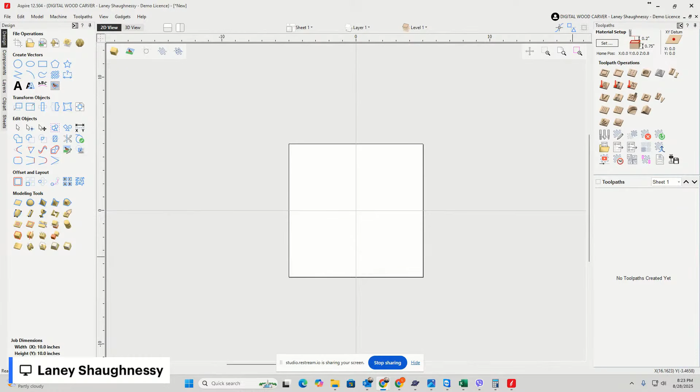But it's going to be a two-sided project. If I can figure it out, right now the bottom side is just going to be kind of smooth with a flat bottom. But if we play around a little bit, and if I can get that wavy, spider web look to the bottom, we'll do that. I honestly don't know, it's one of those things where you see something and go...

Shoot, how do you model that? I'm like, I know how to make a wavy flag, you know, the vectors and everything. That would probably be just a bunch of peaks, because it's going to be a 2-rail sweep, and then it's going to be draped over the bowl. So it'll be an add, you add one shape to another, that gives it that roundness and stuff. I know how to do it, but I don't know if it's going to get me that valley look and stuff. So we're going to play around with that.

But first, the spider web, the bowl, top of the bowl and everything, the main thing, it's going to be easy to do. I think it's going to be fairly easy to do. It's a few simple things, and we are going to see if we can go through it, see if we can get it done, and we're going to go from there.

Now, of course, this is an Aspire project because we are modeling. I'm literally going to draw the vectors, or create vectors in different ways, and create this from scratch. But if you don't have Vector VCarve Pro, don't worry.

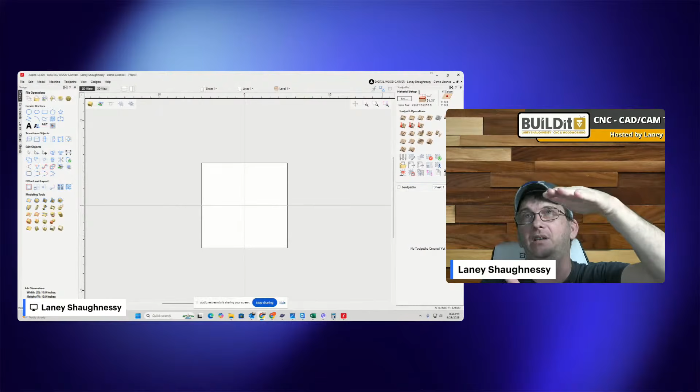The depth of the bowl is either going to be kind of a shallow dish type bowl, or it's going to be a deep bowl, depending on the capacity of your CNC machine - how much room you have to work with. Some machines have a Z-axis with some height, some have low heights, some have high heights.

The stock I'm going to be working off of is either going to be between 1.5 inches and 2 inches. I'm going to use a 2-inch block. But even if it was 3/4 or 1 inch, go a little bit more than 3/4, because a 3/4 inch bowl isn't really a bowl - it's more of a dish or a plate or platter, which is cool too. You could do a cool platter with a big rim with a spider web on it. Anyway, I'm thinking of this like for candy, to hold candy for Halloween, so go a little bit deeper. But it's going to be the same concept - the depth is going to be based on the material and the vectors we draw.

That being said, let's go to the job setup. Again, I don't have anything planned, honestly - this is off the top of the dome, like a rap battle with myself. We're going to make something from scratch, off the dome.

For this, I would like to have a decent size bowl for candy, because it's not going to be very deep, so I don't want it small. I want it bigger so it holds more candy. We'll change it up as we need, but I'm going to go with like a 15-inch diameter kind of thing - so we're going to go 15 by 15, and it might end up being smaller or bigger, whatever the case may be.

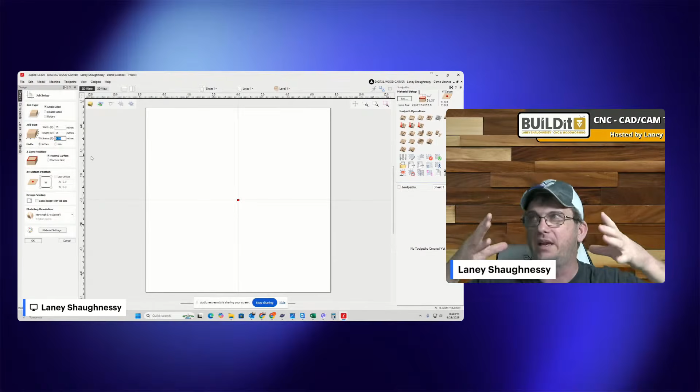Right now, the shape is going to be kind of a rounded shape with a spider web - not perfectly symmetrical, more of a funky, rough, rustic spider web with different points poking out, like an aged spider web. That would be a cool design for the rim. We'll see about getting into the shape later, but for right now I just want to make a round bowl concept, because everything else is going to take time to set up, so I don't want to overcomplicate it. I'd like us to get through this and absorb it pretty easily.

So 15 by 15 by 2 inch - we'll get it started. For this, I'm just going to reference off the material surface for right now.

That's a lie - I'm going to reference off the machine bed because it's a two-sided project. So I'll want to reference off my machine bed, and most of the material is going to get milled away. So the machine bed is going to be the reference. But I will work off the center for this project.

We're making models, so we're going to go with a very high resolution, but higher than very high. I'm going to click OK - I don't have the options right now. So I'm going to click OK, and then I'm going to hold my shift key down and go right back into the job setup.

And that's going to give me those 2 additional options. Let's go larger on the screen - I'm sorry, I thought I had the screen maximized. So by holding the shift key down and clicking on the job setup dimensions, job dimensions and origin icon, while holding the shift key down, that gives me these 2 additional options for extremely high and maximum.

Now, there's no need for me to go maximum right now. I'll say this - I am going to go maximum after, because I'm going to be providing the model file for y'all to download, and I'm going to make it in the highest resolution that I could possibly get. But for the class and for streaming and all that stuff with rendering and everything, I'm just going to go extremely high for now, and we're going to settle with that and click OK. But I'm going to end up going back and changing that resolution so it's a higher resolution when I export it out as an STL to provide for you folks as a digital download.

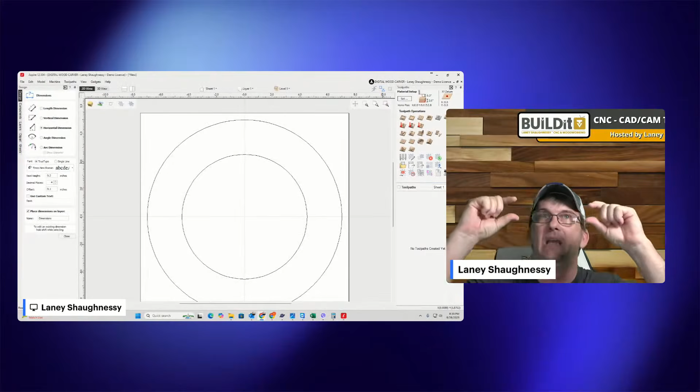Imagine this - let me bring myself back up real quick so you can see me and everything. The lip of the bowl, this rim going all the way around, is going to have a little bit of thickness to it. One, it's going to have thickness thick enough for the spider web, because the web is going to get carved - it's going to be 3D, right? And the spider too - the spider is going to have some height to it as well. So the spider on the web and everything is going to have some height, and all that wood's going to get milled away just for that to happen. You know what I mean?

And so this, and then of course the bowl, that 9-inch bowl, there's going to be - you know, it's going to be rounded at the bottom.

So I want this lip to go around. The reference image I showed you, you can see that bowl, probably looking, I can see a shadow there. It looks like the bowl just kind of domes down, and it's solid right here, and it just domes up. I thought it was a lip, but we're going to have a bit of a lip there. It actually domes down into the bowl, so it's more solid. But anyhow, we're going to have a lip. And if I decide it would be more stable as a dome, we could do that too, or if it's going to have those waves like the spider web, then we'll do what we can.

All right, so the reason why I'm telling you that is on the side - oh, by the way, on the job setup, let's go back into that job setup. It's a two-sided project, almost forgot that. Now I'm going to be touching off on the machine bed for both sides, starting in the center, and I'm going to flip. I like flipping mine front to back, so I'll flip along the y-axis, and let's go back in there and set that up.

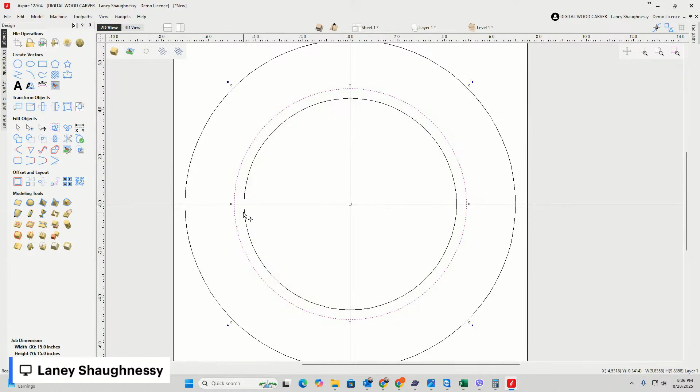And if I wanted to, I didn't have to do that. I could have very much just selected this vector and went over to the offset tool. On the offset tool, I could have said offset outward, and let's say I wanted the wall to be 3/8 of an inch as an example, and click offset - which I was close, I was just a little off. I could offset it that way as well too. I don't have to drag it with the mouse, I could use the tools, all that wonderful stuff, and you as well.

All right, so I do want a 3/8 inch wall, so I'll use the one that's 3/8. There we go. And so that vector is going to represent the thickness of the wall, while this vector kind of represents where the opening is on the dish. That is almost all the vectors we need.

We're going to need two more. Now, have you ever seen on the bottom of a dish where there's a ring on the bottom, kind of where it sits on the table? That way it's just a small amount of surface contact, so that if there's any unevenness, it doesn't wobble or anything like that. So it's kind of flat on the bottom. Our bowl is going to be flat on the bottom, and it's going to come to - there's going to be a ring here. So I'm going to draw that vector in, and that ring is going to probably be about 5 inches in diameter, I think would be good. And then that ring, I'm going to make it hollow so it's not flat on the bottom.

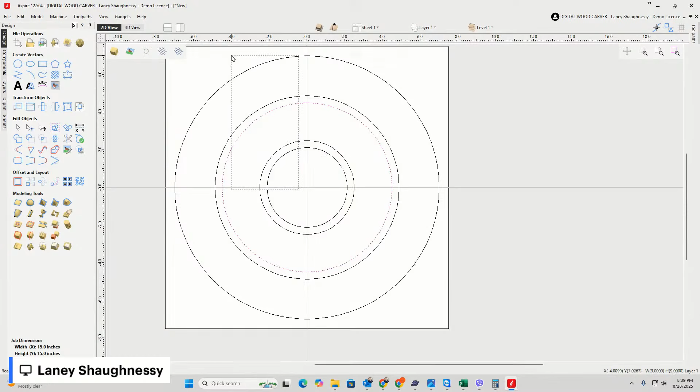All right, so here are these vectors, okay? So those are those vectors, those are going to be for the bowl. Now, let's just, for kicks and giggles, take these vectors, and we're going to also copy them to the other side, so they're over on the other side as well.

We don't need all of the vectors on the other side over there, but that'll be fine to kind of get us started. And then I want to bring in...

Instead of drawing the spider from scratch with different shapes and rectangles, I found a graphic that would be a good tracing graphic for the vectors to give me the general shapes. It kind of speeds up the process. So I'm going to import that bitmap for the spider.

So we're going to import a bitmap, and it's going to be this one right here. Because when it traces this outline, it'll give me kind of where the joints are, and it'll be easy for me to draw the vectors to create those different joints. So this will be a good shape to start with.

So I'm going to go into the trace bitmap tool. I'm going to convert it to black and white. I'm going to turn this up to 75. I'm going to turn the fading off so we can see it, and then hit preview. I'm going to click apply, close, and then turn off that layer for the bitmap.

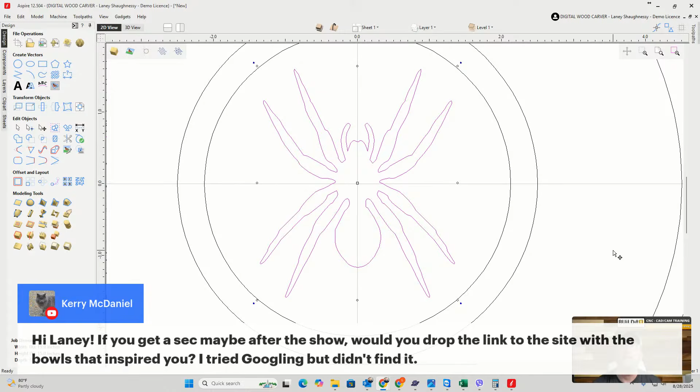There we go. All right, so now basically with this spider, the different areas of the body, those I've got to draw. Actually, to be able to model it, I actually have to have the vectors.

If I just take this one vector and create kind of a domed profile, let me show you what that looks like - it doesn't look good at all. If I come in here with this vector and go into my create a rounded profile shape tool, and let's say I do this at 30 degrees and click create.

Let's go a little bit bigger. Let's go 60 degree, double that up, create, and everything. It's not going to be, you know, kind of that, right? If I just take that vector and build that up, it's going to be that. And it's not really going to be awe-inspiring. It's not going to be that great.

All I'm doing with this vector is just giving me an outline, because I'm not a spider specialist, you know, drawing and all that stuff. The actual body, I probably won't even use the general shapes of the body, and I'll probably do exactly like I just said here in a little bit.

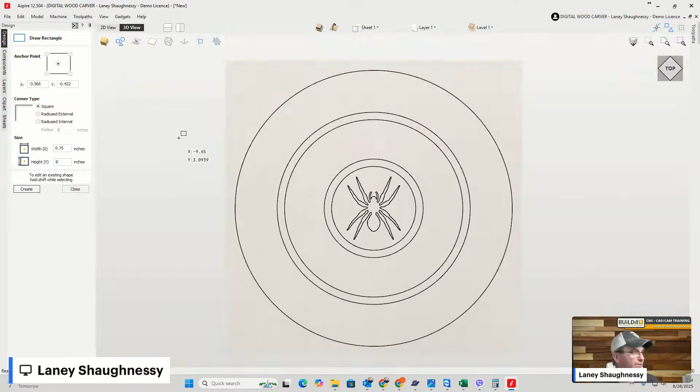Let's go back into a top view, back to our 2D view here. And like I said, this shape here is kind of a rectangular shape. And on that rectangle body, it's going to stop right there because there's going to be another small shape here and then another one. It's going to be that hinge between the back and the main body and everything.

So on this shape here, the fillet tool is what's going to give me the ability to come in and round this off. Let me see how big my shape is first before I start. 0.75 wide. Okay, so the fillet tool.

0.3. We want a normal fillet, not a T-bone fillet. This is going to allow me to round that back area out. And then here, these are going to be a smaller fillet, so let's go with 0.15 or something. And that's going to be here.

But on the front here in node editing, these vectors and whatever I do over here, I want to apply over here as well. So I'm actually going to come in here and, let's see if I can stop. Let me get out of node editing real quick. Let me move this over here so everybody can see. On the node editing, the...

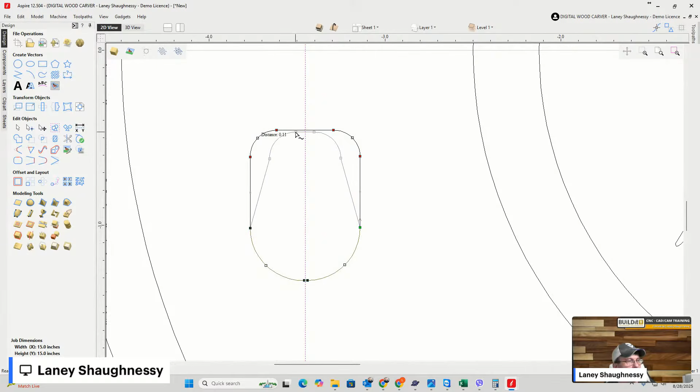There we go. I'm going to select these 4 nodes right here, and I'm just going to pick one, and I'm going to mirror vertically. Nope, horizontally, what am I thinking? Mirror horizontally, meaning whatever I do with these 2 nodes on the left is going to happen for me on the right. Okay, so that allows me to pull these in and it'll allow me to start creating that shape and everything. So when I mirror in node editing, when I have the vector selected, I can mirror horizontally or vertically, and whatever I do to those nodes will happen to the other nodes, kind of thing.

And so once I have the general shape and everything, then I can start creating the other shapes and stuff, right? So it all started from a rectangle. All the shapes are going to be rectangles. And then from there, they're going to have curves, or they're going to have this, or they're going to have that. Now, right here, let's take a second.

Right here on this, remember I said it's not really straight, it's kind of more bulged out, right, and everything. So really I want to select these vectors here, and oops, select that one and this one, and once again we'll mirror that horizontally right down the middle there, and whatever I do here, make it a Bezier curve.

And on this, let me make this one a Bezier curve. And so I don't think it's going to let me mirror the Bezier curve. Let me see how. I don't think it's going to let me mirror that. So...

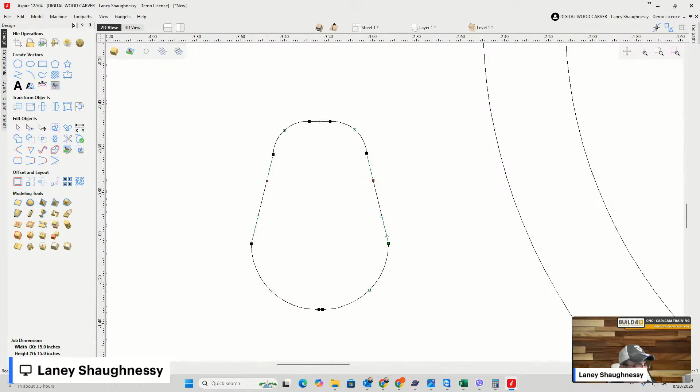I'm going to delete this point here and here. And what that's going to do is give me these curve handles and everything. And then I can just pull this out. And I should be able to, now that I have those handles, I should be able to mirror that. And I should be able to pull that in and out. Let me come over here and I should be able to select that one.

There we go, they're going to be slightly more rounded. Let's go a little bit like that. And then down here, this one got moved for some reason, it needs to be kind of down so it matches there. That'll give me my main body shape. Then I can start with the hinge in the middle of the body, then the next one, then the legs. Node editing is going to help me get to where I need to go for the spider.

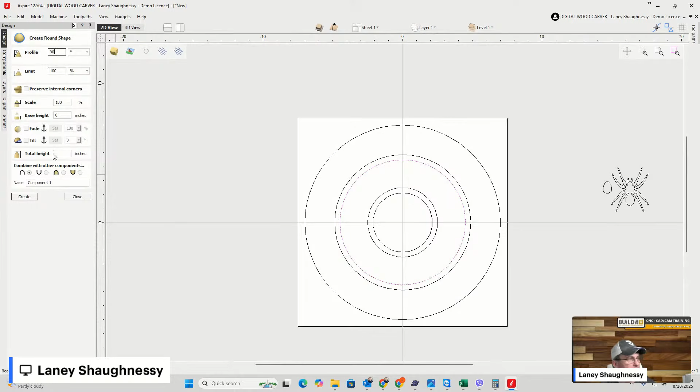And what we should see if we look over here is this dish. Let's turn off the vector so you can see, and let me turn on a zero plane to give you a better visual. Model - oh, I got to close this first. Okay, and you can see that dish.

Now very quickly, you see that lip right here. That lip is generated most likely because my model on my material setup is probably sitting down low, and it needs to be at the top of this side here, on the top side. And the bottom side will create that in just a moment.

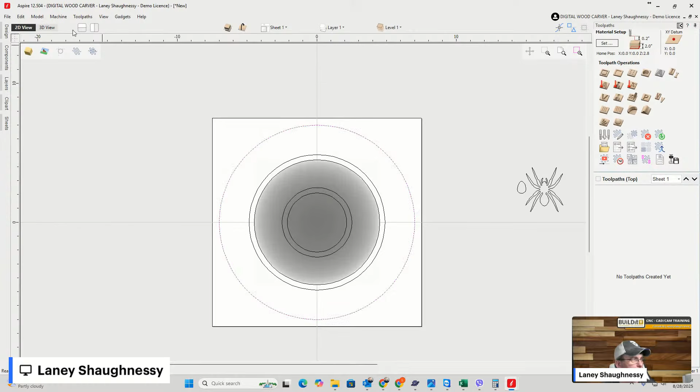Now on side 2, let me flip over here - on side 2, we're going to be doing a bit of a 2-rail sweep. And in order to do a 2-rail sweep, we're going to draw a profile.

So on this profile, I'm going to start off with a rectangle. The rectangle right now is going to be 2 inches in height, because that's how thick my block is. And the width is going to be the measurement from this outer edge to the outside edge of this little ring, this platform area right here - that horizontal measurement, which is 4.5 inches. So let's go to the size, and the width is 4.5 inches by 2 inches in height.

Okay, and now this gives me something I can draw my shape with. So here, the lip - that outer lip is going to be important. There has to be some thickness here for that rim, because I want that brim around everything.

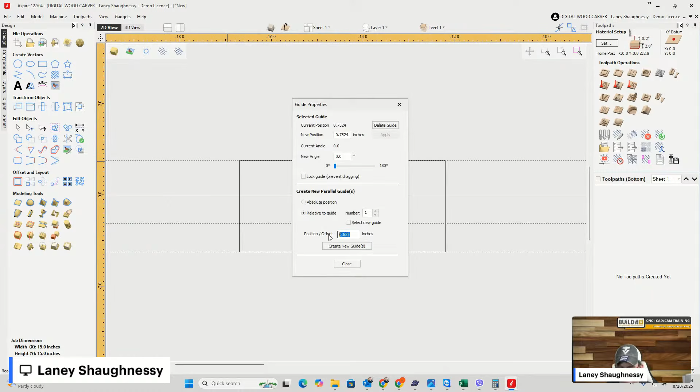Let's try that again. Make a relative guide negative 0.25. Now, this is going to represent the height of that little lip. Think of this block right now as upside down - we're looking at the bowl upside down. And on that lip, starting at this edge, there's going to be a curve, an arc. I'll just draw it as an arc. Let me see what's the best way.

I want it to be more rounded. So let's look at this real quick. There's going to be a line that's going to come over here. This is going to represent, oops, didn't snap to the guideline there. So this line is going to represent the outside edge of that bowl right there. So all of this area - now my lip only goes to here.

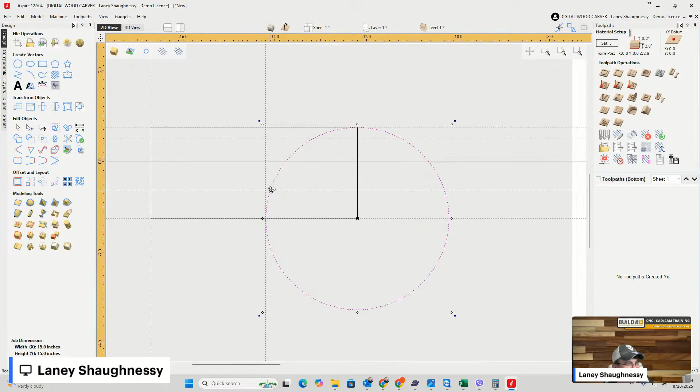And from this point over to this point, it needs to be that bowl shape. Now, the question is, do I come in here and make a circle? Not like that, not right there, but let's hold the shift key down. Do I make a circle that meets up to there? That gives me a nice rounded bowl, no undercuts or anything. So starting at the bottom corner here, just drawing a circle to get that kind of radius. That would work for me.

And I'm actually going to have the lip go right up to there and around, so that will be fine. Let's make sure that I didn't overshoot my shape.

I'm holding down the shift key to size both sides in, creating that. And I'm going to take my scissors and get rid of all of this. The line - I thought I left the line there. This line is going to go here. Let's get rid of the guidelines now so you can see. We're going to trim this away, so that's going to be that. And then this guideline stays right here, and this line here, so we've got to trim away this. And the bottom line we don't use in a profile, that span, so we delete that span.

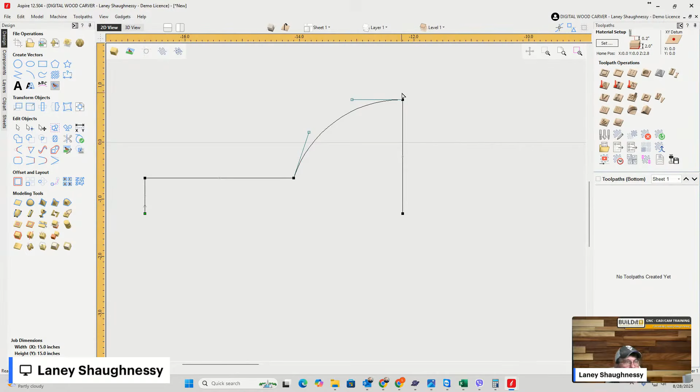So this is going to be the shape of my bowl. Now I could go wider if I think - like that other bowl, the one with the honeycomb, it went all the way out to the edge. I'd like it to have a lip, I want it to sit. This is where it starts flattening off right here at the bottom. So this is just a curve into the flatness - all you're seeing is right up to that rim. So that's my profile for the 2-rail sweep.

And on that, we're going to do a 2-rail sweep. We're going to select this vector and this vector - not the, get rid of that. Hopefully y'all are still with me and understand. Let me pull this over on the screen so everybody can see, and I'm going to pull it right here so you can get the general idea of what's going on here.

Now notice this shape here - this is where the inside of my bowl is, that's where the dish starts. My line is a little off right here, so I'm going to go into node editing and pull that out to here. I need that transition to occur, and I actually need to pull it out to here, because I need it to be the thickness of this. And when I did that, it changed the shape of my bowl. Hold on a minute, dadgummit.

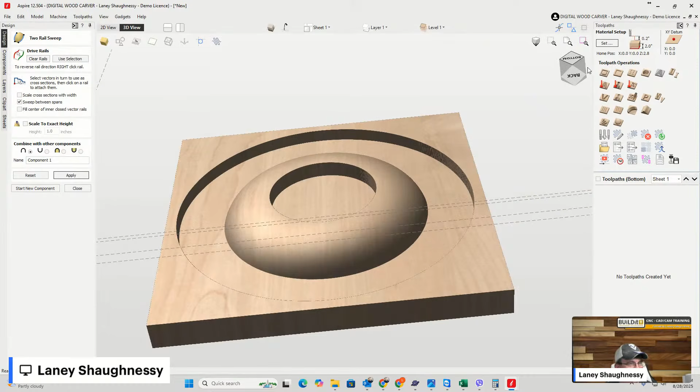And what we should have is this shape here. Now, you see how it drops down right here? How that drops down in the middle? The reason why that's dropping down is because of this down vector right here.

And what I should do is remove this down vector and run a straight line straight across to the midpoint right here. That's going to create the flat. So let me do that.

We're going to take a second, let's get rid of this. With that being said, I need to come straight across here, right to the middle. Y'all still with me? Okay, this vector is going to go away.

And I actually want a little bit of a lip. I need a little bit of a lip. I need this to stand proud, and I want it, like I said, 1/4 of an inch. So this actually has to step down 1/4 of an inch and then come into this shape. So let me do that.

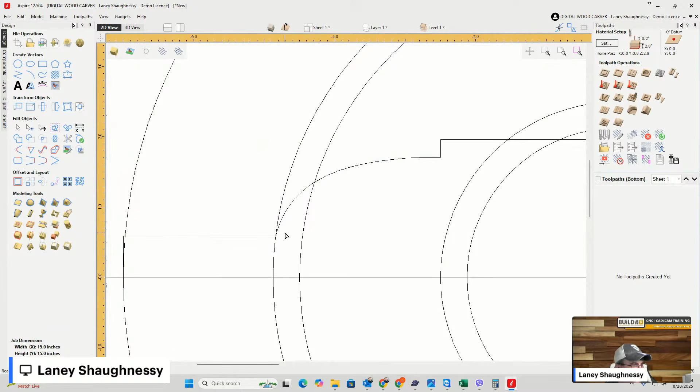And I'm actually going to kind of see if I can finesse my shape a little bit. I can't, whatever I do, I can't generate an undercut. So that's gonna, we'll use that shape right there. Just can't generate an undercut and everything.

Okay, now the vectors, these two vectors have to be joined together. And right now they're two separate vectors. There's a disconnect on them. And so I need to connect those two together, and connect those two together so that it's one open vector.

That'll be good. Now, timeout. There's two separate tool paths that I could, or two model creating tools I could use for this. One is the turn and spin tool, and the other is the two-rail sweep. Right now, we're looking at the two-rail sweep, but I'll also show you the turn and spin tool too, which will work as well.

But let's select the two vectors. And Kimberly, Candy? What's the question mark about Candy? What's your question about Candy?

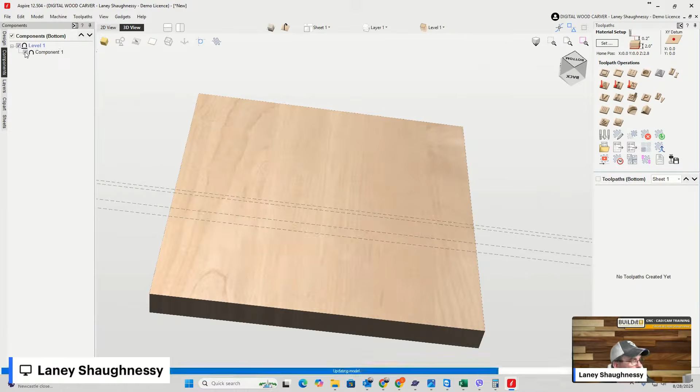I've got the line drawn to here, but I'm using this vector out here. And the moral of that theme is I'm going to cut that vector off right there. And we're going to do that one more time. So let's delete this.

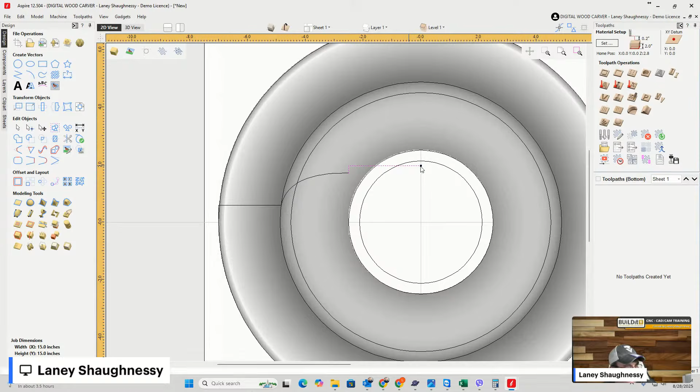Sorry, ladies and gentlemen, I screwed up on that. We're going to select this and this. Don't be stupid, it needs that leg. That's the whole thing, is the leg is not there, so it's cutting it off. So let me put the leg on here. And then we can move on. Join.

All right, straight line, going to come down. I need to align with this endpoint. And that's another problem, my vector is below the center line, so I'm going to move it up on the center line there. Go into node editing and pull that up to there. All right, one more time, ladies and gentlemen.

It's finicky when it wants a certain something to happen or to be in place or to be in line. So let's do this one more time. Better. All right, let's delete the first component. And the second.

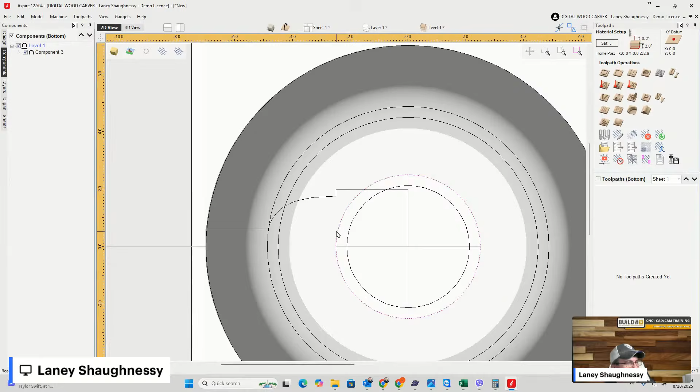Okay, the dish area here is a little bit too deep for my liking. I don't want it to be, I want that lip, but that's too hollow right in there. So we're going to take this vector and we're going to fill in this area.

And let me actually look at real quick. Let me look at, I'm going to turn this component off for a second. Let me look at the other tool. If I select this and I use the spin around, oh, I'm on the wrong side. Hold on a second.

For that tool, it has to be flipped over that direction, it works off the left side. So let me delete that. Let's do that one more time.

And that's what I'm looking for, that's exactly what I want. So the turn and spin tool is going to be the better option for this instead of the 2-rail sweep, because that's exactly what I needed to fill in that center. That's 100% what I want that to look like. So the 2-rail sweep was not the way to go on that one. See, learning, ladies and gentlemen - we figure out what mistakes we're making and then we just go from there.

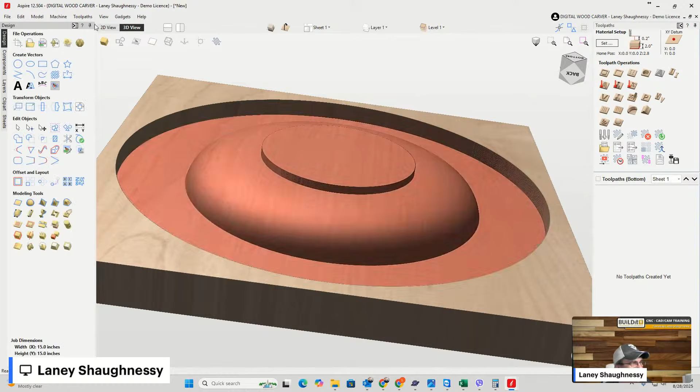Okay, let's delete that one. That'll be our bottom. Now one more. Like I said, I want it to be slightly hollow in here, so this vector on the inside is going to be a flat shape. It's going to be a subtract, and we're only going to subtract a quarter of an inch. Remember, I want that quarter-inch rise.

So when the bowl is sitting on the table, it's actually going to be sitting on this rim more so than anything else. Now, on this rim, it's going to get smoothed over and everything like that, but I'm actually going to add a draft to it.

And on the draft, we're going to do that right now. I'm just going to add a draft to this. We'll go 20 degrees.

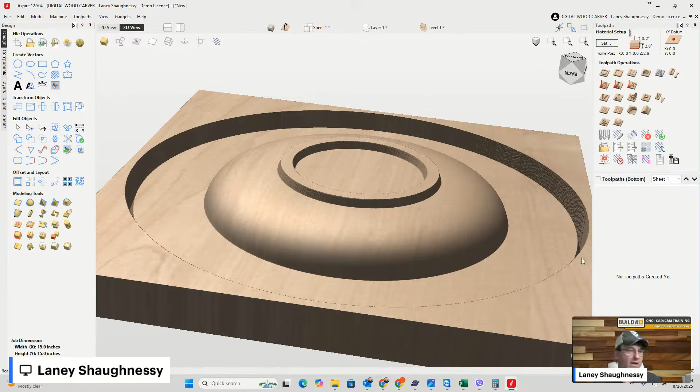All right, so now that's the underside of the bowl here. The outer perimeter, I'm still leaving this wood in here because this is kind of a two-sided project, so we're going to leave that there. It'll just get profile cut out.

Again, if I wanted it to look like a spider web on the underside, the waves and all that, that's a project for another day. It's not for this project right now. I mean, it could be the same project, but not tonight. Tonight we're just going to make a bowl because we still got to model - we're already an hour into class and we still got to model the spider and the web.

All right, so this is what the bottom is going to look like, and this is what the top is going to look like, minus the ring. Let's get rid of - let's do this. On side one, let's turn off the zero plane.

Okay, and so what you can see is on this bowl and everything here - so this is going to be the bowl. Again, it's only 2 inches, so it's still a dish. It's not really a bowl. I mean, it's kind of a bowl, but it's not really a bowl.

But this material up here, this is about to get turned into a spider web, and then there's going to be a spider modeled on there. Remember, I only gave myself about a half inch of that to deal with. But this is the bowl area here.

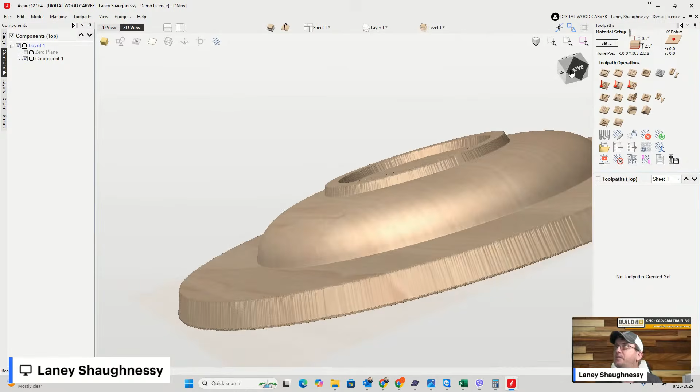And my draft is a little rough on the edges - we're going to clean that up. That's because I made the draft on a lower resolution, I'll go back and fix that. But anyhow, yes Kimberly, we're going to use alignment pins to flip it over from side one to side two, for sure. And a draft is an angle.

So instead of having a draft—you hear that term a lot in construction, like with concrete or molds, and even in manufacturing with plastic injection molding—a draft means instead of the walls being straight, the walls are at a slight angle. This allows the part to pop out of the mold easier.

In this scenario, we're not using the draft for any kind of mold at all. It just gives a slight angle to add a bit of base meat to the part, so it's not so straight.

In Vectric documents, the draft tool will automatically add a minimum angle to any steep walls that exist in your model. The draft angle is specified using the slider bar. Yep, exactly right.

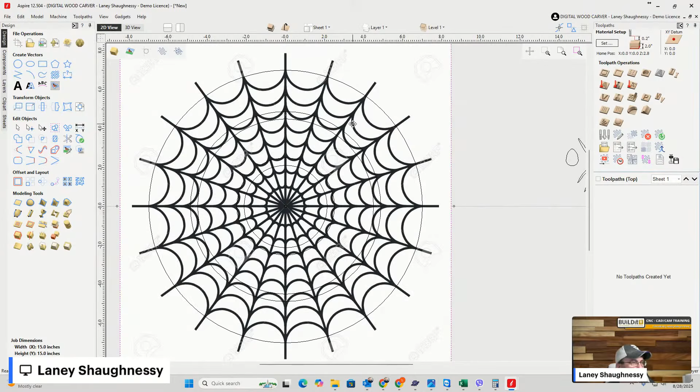I'm going to use it a bit and change the size so we get more of the web in there. I'm going to use the vectors that get traced here to help me create the web, so let's go into the trace tool.

I'm going to convert it to black and white and slide this up to 75. 75 is my go-to threshold, 50 to 75 for the most part on most things—I always go to 75 first, and if that doesn't work, I go down from there.

Now from here, since I have this vector, let's get rid of the image. On this vector, I could skew it—let me close this tool. I could skew the web so it's kind of larger on one side and smaller on the other.

It's all going to get trimmed in here, but I could skew it to give it a bit of a different shape, so it's not exactly perfectly symmetrical. It doesn't have to be perfectly round—whatever shape you want, you can give it that aggressiveness.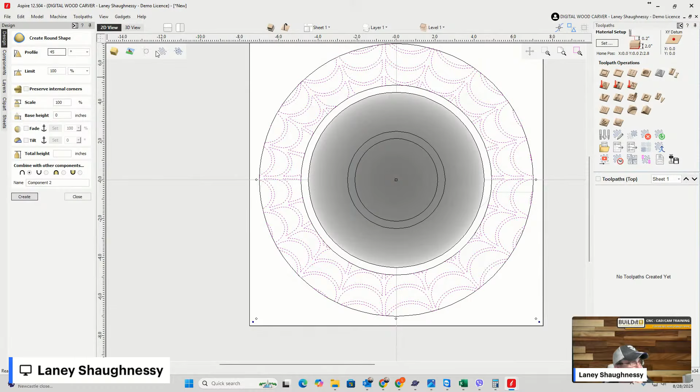And I need it to have some base height. So I want to go a 1/16 of an inch. This all will get drafted, so there'll be a draft on this. We're going to do that in just a second, but a 1/16 of an inch is going to be good. I don't want to go too high on it.

Because of the simple fact that... what am I trying to say? Give me just a second to get my thoughts straight here. I don't want to go too high because I have to build the spider, right? The spider has to have some height too, and I only have an inch. I only have a 1/2 inch of material to kind of work with, so I don't want to build up too much. Now, what I'd like to do, what would be ideal for me?

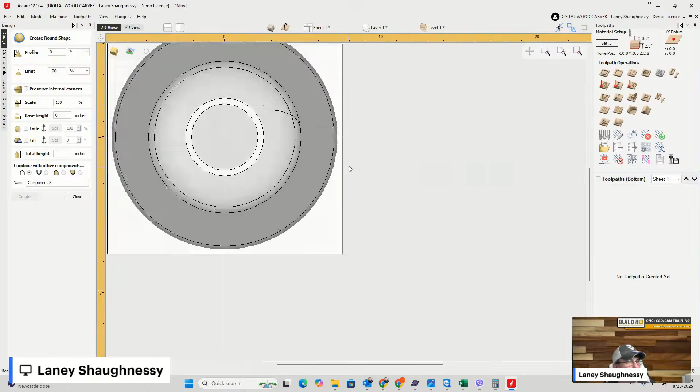Let me come in here and look at this real quick. Okay. On side 2 here, notice how my bowl comes out past, that model comes out past this line here. I'm going to take a second and hold down the shift key. That was the draft angle there.

I'm going to select this component and I'm going to clear everything outside of that vector away. I'm going to remove that. And what that should do is that should bring my web right up to the edge there on that outside. Exactly like that.

Okay. This inner area right here, that space going into this rim, this is all this material has to get carved away. All this material has to get carved away to here, and it's, you know, to transition into this bowl area and stuff.

So what I probably am going to do is I'm probably going to take these 2 vectors right here, and I'm going to build a flat profile, a 1/16 of an inch tall, same height as my web.

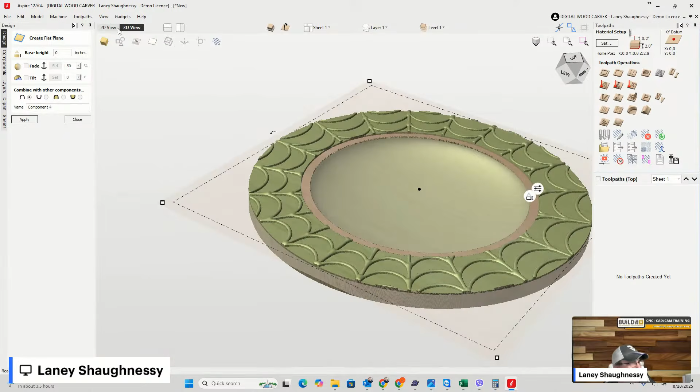Oh. I've got another vector selected somewhere. Hold on a second. What other vector is selected? Oh, those are grouped together. So when I was selecting the inside one, it was selecting the outside one like a goober.

So we actually need to delete this one and this one. Okay, one more time. See, I had this outside one selected. That was a no-no. I need these 2 vectors selected right here, this one and this one. All right, so one more time. Flat, 1/16 of an inch, 0.0625.

Click create. That's going to give me this little ring right here. And you see how it bulged this up instead of kind of blending with it, right? Because this was cut right off here.

Well, what I need to do instead of doing it all on one level, I actually need, let's get rid of that really quickly. I actually need this vector. I need to create another one, slightly offset outward from that. I'm just going to go a few thousandths of an inch. 0.03 is fine. And I actually need to use this vector and this vector here.

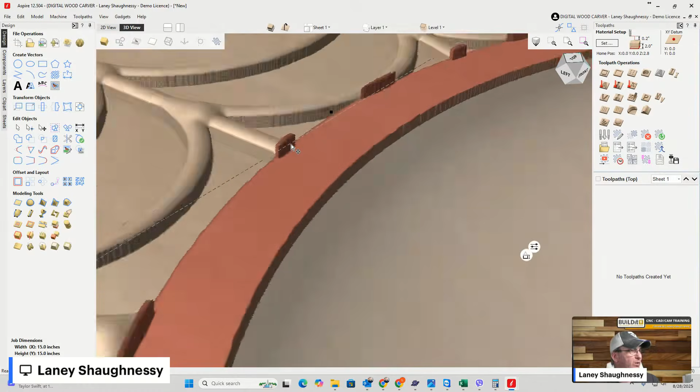And when I create this flat shape, that 1/16 of an inch flat shape and everything on there, what's going to happen is in the 3D view, you see how it bulged up where the spider webs and all. That's because on those components, I need to create a new level. I need these two models, the web and this ring, to interact with each other, but not interact with the model that's below it. I need that level to interact.

So what I mean by that is the web and this ring have to merge together, but they both have to be added to the one below it. So insert a new level. The ring and the spider web, these two need to merge with each other, so that they blend and merge with one another. And then that level needs to add to the level below it. So it needs to sit on top.

Okay. We got that. All right. Now I have some weird anomalies right here that are just anomalies. Exactly that. So turning off that model, turning it back on, it's a glitch. It's a glitch. All right, so that's going to be the top.

Now we got to put the spider on, okay? We're an hour and 21 minutes on it, still doing good. Still, y'all's minds are still with me, hopefully.

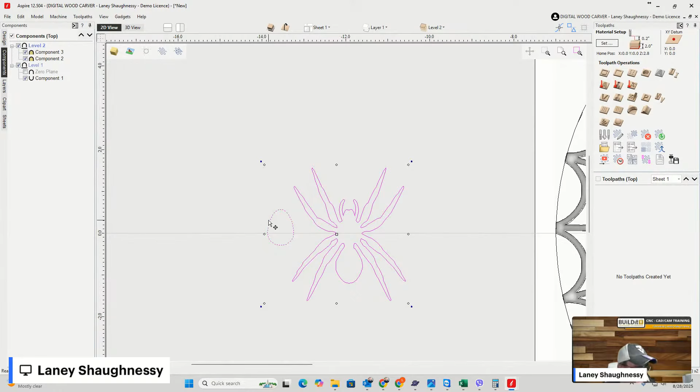I'm just using the spider as my reference, especially the legs. So all I'm going to do is draw one leg, and then it's going to get copied around and adjusted if there's any slight difference. I'm going to make it simple on myself, because some of the legs are going to be straight and some bent. But I'm not going to draw the vectors for every single leg. I'm going to draw one leg vector, copy it around, and then make the node adjustments as needed.

Starting with that, there's going to be 3 hinges or 3 sections on the leg, and then a little ball section, a little square. If I was drawing this, remember what I said, I'm starting with a rectangle. Imagine a slightly larger rectangle representing the larger part of the leg, then a smaller rectangle, and then an even smaller rectangle. They're going to be shaped and rounded with node editing. Imagine that's the shapes we're starting off with, and then we're going to do some node editing and clean things up.

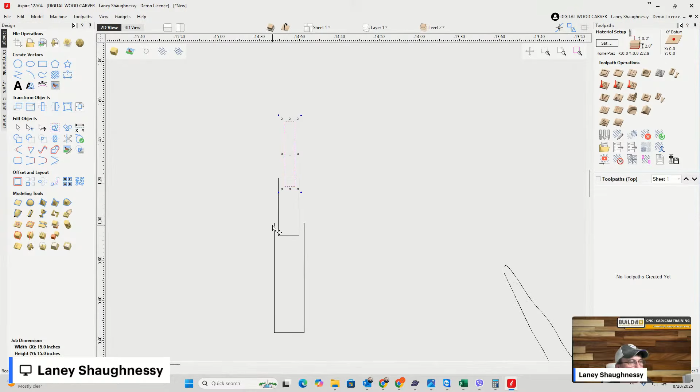For the most part, I'm just going to take this and drag it over to one of the legs here. I want to get my joints and lengths about right. This one is fine here, it's going to be fatter so it'll be a little shorter. This one's going to be slightly longer, and this one's going to be a little bit longer. So we're going to go something like that - that's going to be the rough general shape.

Now we're going to go into node editing and really make this thing look like something. We'll start with the little one because it's the easiest. I'm going to pull this more to a point here, and turn the legs into a Bezier curve so I can adjust how they look, especially the tip on the foot. It's a spider leg, so it doesn't have to be perfect at all. On the edges here I don't care what happens because this is going to disappear into the other leg, merged into the other joint.

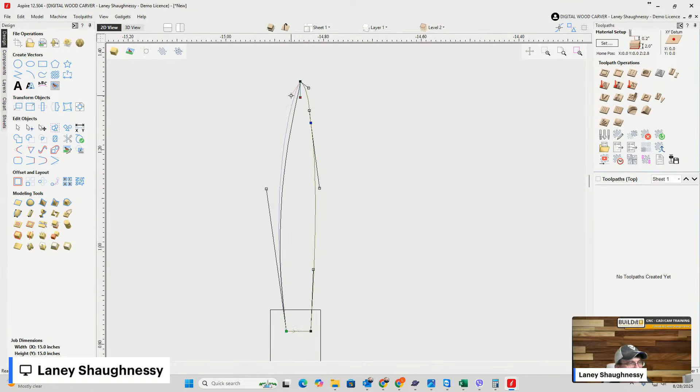But here on the sides, I want to turn this into a Bezier curve as well so I can make any adjustment. On this one, I'm actually going to delete this point so I'm working with this here. If I feel it needs to curve in, I can do that, or add extra points to give it a little rigidness. I can change some things slightly, but again I've got to be somewhat organic. So this is good, I'll call this good for this one.

Now here, same thing - this joint is actually going to be a little bit wider, but it's going to come from this leg and bulge out here. So in node editing, I'm going to pull this over and pull this over, and turn this into a Bezier curve on both sides.

I want kind of that bulge here. As a matter of fact, I'm going to come a little bit off that, so it does kind of look like it's jointed inside there. Maybe not that far off, about like that. This leg here can have a little bit of an organic shape where it kind of comes in a little bit. That's good.

And then the bigger leg. Again, these things are going to get turned and all that stuff, so this is just a starting point. I'll be able to stretch these, make them longer, do all that stuff and everything. But similar scenario here, so I'm going to pull this in. Bezier curve.

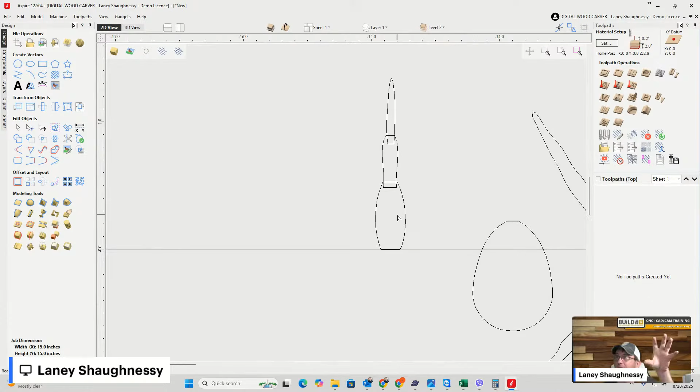Now I want to take and right here, imagine if you will, let me get out of node editing. Let me group this together so it kind of gets treated as one item. And let's find something that's fairly straight. Let me rotate a little bit. So kind of imagine, if you will, that this is the leg and all. I can kind of start getting the size right and everything.

I can ungroup this, and I can come onto this one. Node editing, I can maybe pull this up a little bit into here, and here, pull that back around. Whatever shape that I want to kind of get in that general feel and all that stuff. But there's going to be a kind of a ball right here that's going to connect to this, another joint, if you will.

And so on that, for that ball, I'm actually going to use more of an ellipse. Let me actually rotate that, size it up.

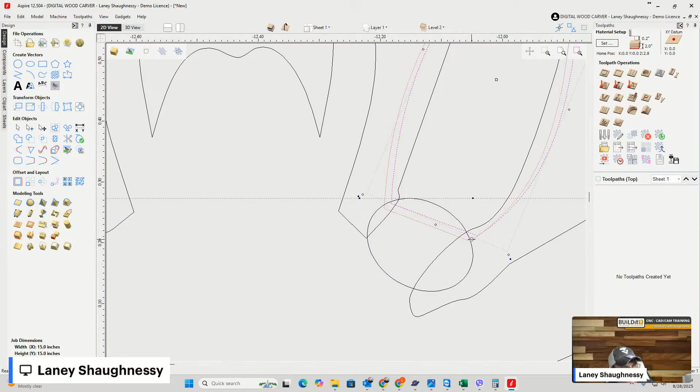All right, so now I'm going to hold the shift key down and I'm going to grab this on this side and I'm going to pull it in. I need to be somewhat smaller, not a circle. And kind of want to pull that into there.

Okay, so I'm going to select those 4 shapes. 1, 2, 3, 4. Let's move them over here now. And this is the back body.

Okay, and then there's going to be another body here. So let's get, as a matter of fact, we can actually, I'll just take this one here, hold down the control key, drag a copy of it up here. And this one in node editing, it's going to be a little bit more rounded. Kind of at the, here and everything, it's going to be a little bit more rounded. This is going to be more in line. I'm going to take this right here and just kind of use that as my joint.

Okay, and then on the legs, there's going to be 8 of these, and they're going to have different shapes. Some are going to have a bend and all that to them. I'm going to try to, I like the way this one is laid out, so I'm actually going to kind of work off of its body style and everything.

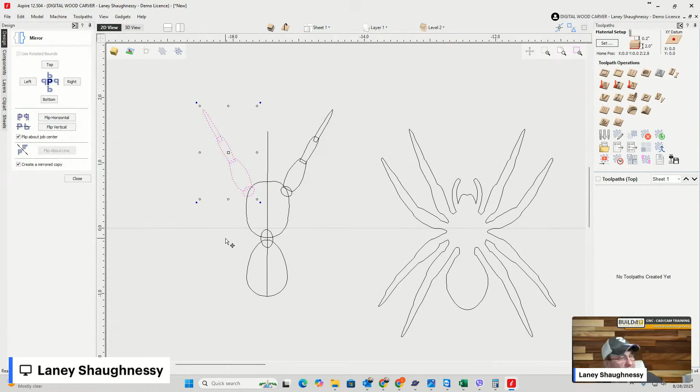And everything, and if once I get it somewhat laid out and stuff, if I feel that things need to get wider or bigger or this or that, then I'll do that. And again, there's no head on this just yet, so we're just going with there.

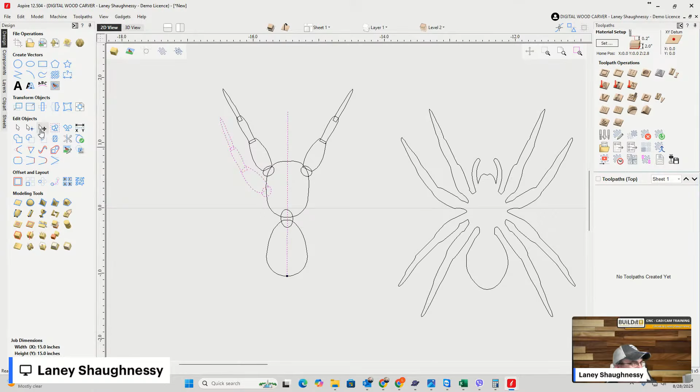Again, this all makes sense when we actually make the shape, but I'm going to select these four vectors again, select that line last, and just flip about the line again to get a shape on there, right?

I could spend hours moving and articulating these legs to create the perfect shape that I want and all that stuff. But tonight, this is just to give you the basics, the idea, the general concept, and then from there you work your magic.

I'd put the legs on the body in a separate layer and maybe change their color and things like that. Sure, yep, absolutely. We'll probably do that for the finished model and stuff.

All right, so now I've got the upper legs here. Now I just need the lower legs, and all I'm going to pretty much do there is select these two vectors, and I'm literally going to hold down the control key and drag a copy of them out. I'm going to kind of flip them vertically, V as the keyboard shortcut I clicked for that vertical flip.

I'm going to drag them over, rotate them, and I'll move this one in just a second. But take this and kind of move in here. And on this one...

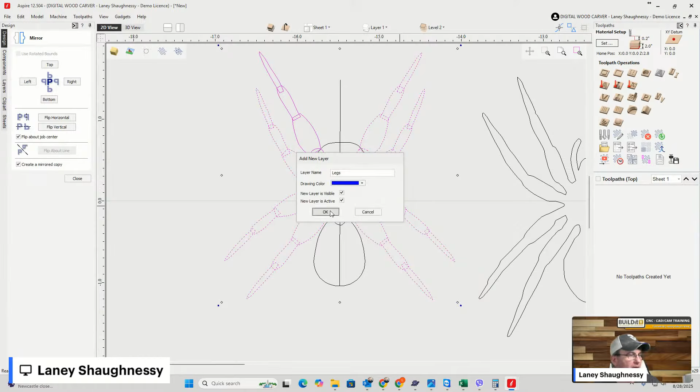And I could give them a different color. Let's say that I gave them kind of a blue. That way when we're looking at the different parts, we can see the difference in those vectors and know what we're working on.

All right, let's kind of get the head going on here. So I'm going to start off with, again, a little bit of a rectangle.

All right, in node editing, I'm going to go ahead and pull this up. I'm going to go into Bezier curve on both of these. Now notice here I drew this and I'm still in that legs layer, right? So make sure that you make the layer that you're working on active, and don't accidentally draw in the wrong layer and all that stuff. All right, so same thing here on the head. And all the body parts, they could have their own layer and all that wonderful jazz, whatever you want.

All right, so what I'm doing here with this is going to go into node editing. I'm going to go with a Bezier curve, and I'm going to pull this out, kind of curve here. And on here, same thing, but this is going to get pulled in. I'm going to delete this point, and I'm going to make this kind of a shape, and actually I can bring that in a little bit.

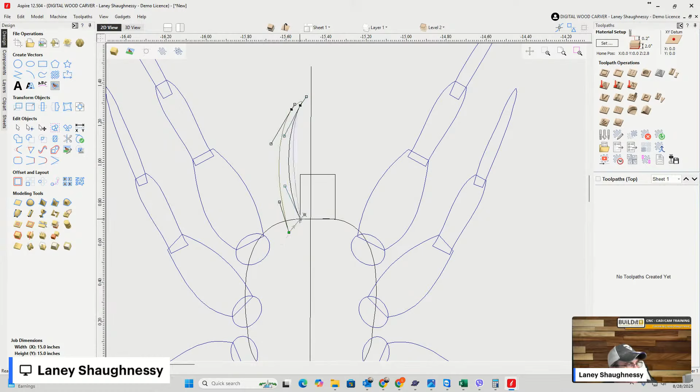And I'm going to bring this into the body. That way when I bring it down into the body, when I build the parts, they're going to merge together and stuff like that. On the head, you've got to think about the full vector here. So there's a head right here. I'll give it kind of that little mouth shape there. It doesn't matter on this.

So node editing on this, we're going to... let me cut the vector here. I'm going to turn this into a Bezier curve so I can kind of pull that up and down.

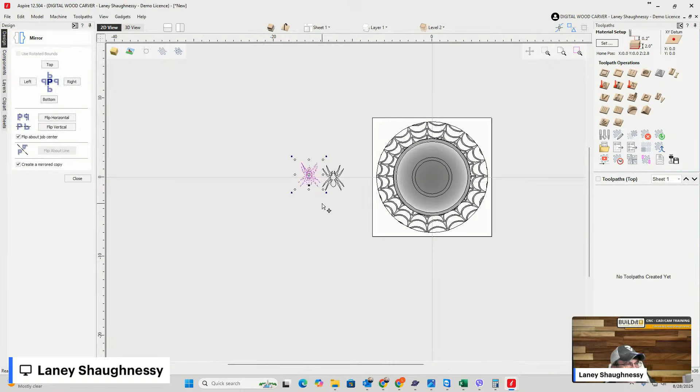All right, so let's go ahead and build this model. So now in order to build the model, let's take everything that we drew, that we created, all the vectors we created, and let's move it over so we're not dealing with a lot of stuff in our way. We can take, I know the legs, the spider legs and all are on one layer. I'm just going to move them all to that leg layer for a minute because I'm going to turn off layer 1 for a minute so I can build and work on here and stuff.

All right, so for building and working on here, first thing I'm going to do is go into our create shape tool. Let's go to the 3D view. For right now, let's go ahead and turn off this component. I need level 2. I need the spider to interact with the web and all that stuff, so I'll keep it on level 2, but I'll go ahead and turn those off for right now. And on the spider, we're going to go ahead...

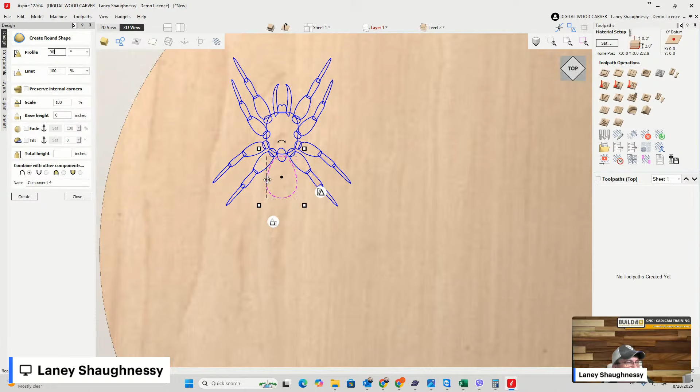Create a round shape. Now I'm going to end up pushing the stuff with the smudge tool and things like that, but for right now I want to kind of dome this up, right? So let's go to the 3D view. I want, when I build up this body and everything, I want it to go like full on dome, right? So I'm going to go the full 90 degrees here, and I don't want any straight meat underneath it. So I want a no base height, and this is going to be, I'll call it the butt.

I don't know, the rear, what have you. Let's turn this to the side so you can see what's going on here. I'll end up kind of smudging this a little bit to put more weight back here and flattening out a little bit up front. So that's going to be the butt area.

The next vector, that hinge area, same thing. It's also going to be a 90-degree dome, kind of, and again I could probably flatten it out. So what I'll do is go 90 degrees but limit it to 80%, and it's going to merge with the other part. What that 80% does is round it off and then flatten out right here.

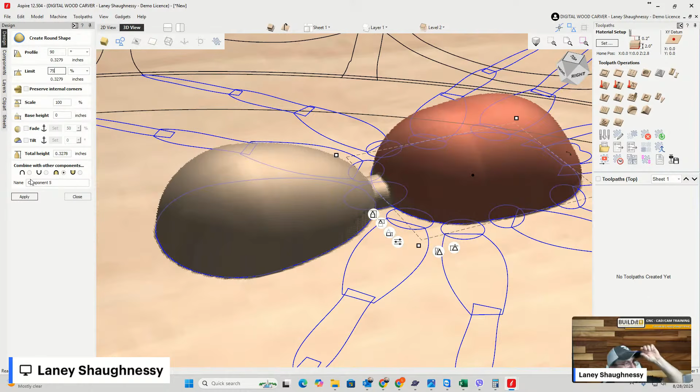Okay, and everything. All right, and then the body, again 90 degree, but I'm going to have this one also flatten out, and I'm probably going to go 75. So it's a little bit more kind of flat here.

And again, ladies and gentlemen, when I have components and stuff, I can make adjustments all on the fly. Whatever, as I go, I can make adjustments on the fly if I want to change something, all in the 3D view.

I'm going all 90 right now just to give me the most out of the dome that I get, and then from there I can do the smudging and all that stuff, and I can flatten out and what have you. Now this one, I'll probably just go 60 on this one.

Let's see, let me see what 90 looks like. Yeah, I'm going to go the full 90. And then I'll be able to smudge and things from there.

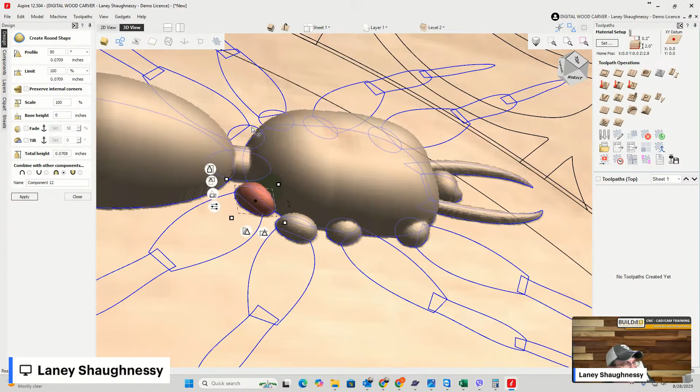I'm just going 90 degrees. They're merged, everything is merged, so it's merging into the body. I'm just doing this 90 degrees all the way around. I can go in there and adjust the shapes as I need later, but I want to get the initial shapes done. So 90, create.

Almost there, ladies and gentlemen. We are an hour and 55 minutes in. Hang with me just a little bit longer. We'll get this spider made up and then kind of go from there.

Okay, now on that one I didn't want both vectors, but it was joined together—it was grouped. And you see, it made it just fine as one group, instead of individual. It was all grouped together, but that's exactly the look we're going for, how it hinges into each other. So that's good, but I want to undo that.

Because I need to ungroup that. This one too, I believe. Let me see, did I have any other group together? Okay, so it was just that one. All right, so let's go back over there.

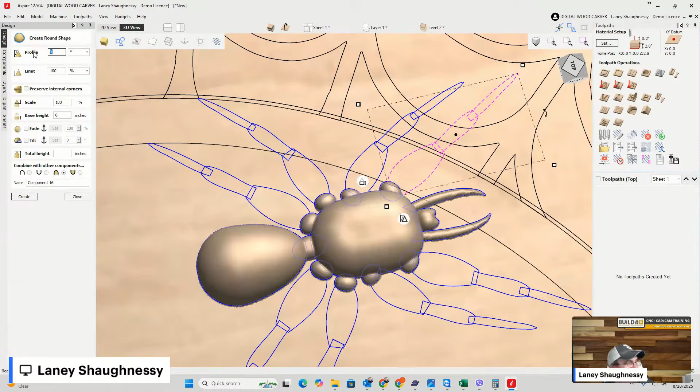All right, so again, I'm going to go the full 90 degrees on all of these.

Each leg individually is going to be its own model, the leg. And I can go into node or sculpting, and I can push, pull, drag, add, remove, whatever I want to do to kind of give it its organic shape.

We'll do one of the legs in sculpting so you can see what I'm talking about, and we'll do the butt area. Here, I need to merge it again. There we go.

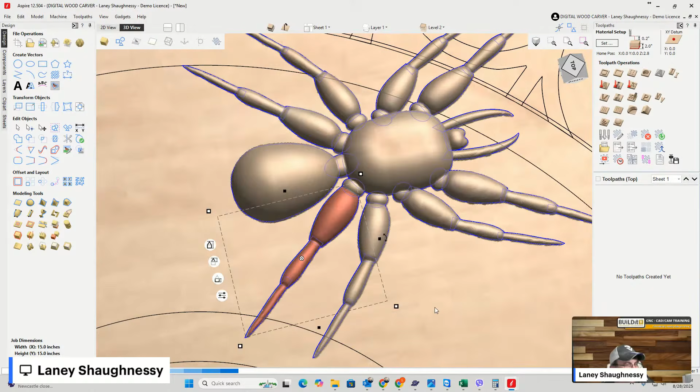Now, for a generic spider, not too shabby, right? With no sculpting, no shaping, no modeling, no nothing, right? Not bad. It's a good looking little spider. Nothing wrong with it and everything.

What we're going to do with it, however, really quickly, we're going to go into our components. And the components that we're working on, we really want just that to be what we are modeling and sculpting and all. And if I select the butt here and I go into sculpting, sculpting wants to sculpt the visible model, not the selected component. So it would want to sculpt the whole thing, and it would bake everything together, and it would just sculpt the whole thing as one, and I don't want that. We don't want that.

So in the components and all, it's the visible model that matters. So in this case, I actually want to right-click on that. I named it, but I want to go down to show only this, so that's the only thing showing. Let me go over on side 2 and turn off side 2 for a moment.

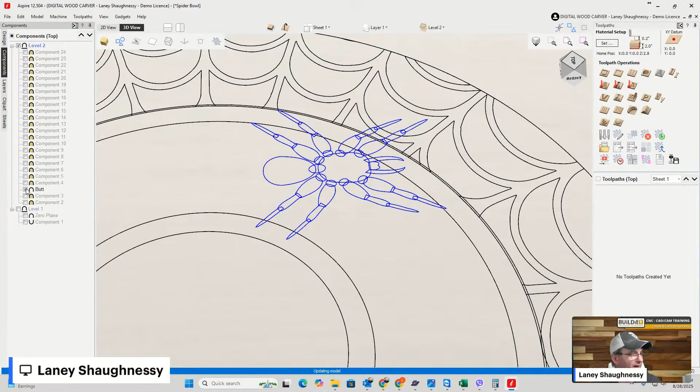I could have done that. I don't know what I'm thinking. I could have done that right here. I could have turned off that other half and all. But just that butt area right there, that's what I want to go on and sculpt.

Got to select it. It's got to be selected, even though it's visible. It's got to be visible, and it's got to be selected. All right.

So now what I'm doing with this is, first of all, I'm going to turn my radius down. What I'm doing is I'm taking this material right in here, and I want to just kind of push it towards the back, right? So that's called smudging, and I want to basically, not aggressively, not a lot.

I want to kind of smudge this towards the back. And what that's going to do is it's going to kind of flatten that in. It's really pixelated because I think I had the pixelation turned down to terrible resolution. But you can see how I've smudged, pushed that in. It's like taking it and pushing it uphill, kind of thing. And if I screwed up and didn't want it that much, I can do the undo brush and run it right over it, and it's like it didn't even happen. So, that's what I actually wanted.

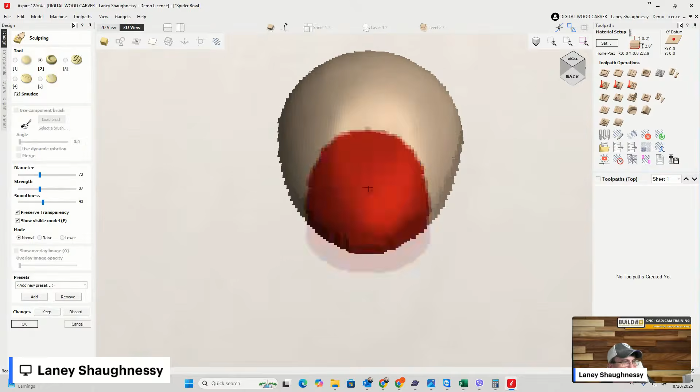So I really kind of want to move straight back. In this position here, I just want to kind of go straight to the back. So from here, hold down the button and push, push. Not a lot, I don't want it very deep. I just want a little bit of an indentation right there, like that.

Okay, pull that smudge a little bit more to the front as well. That's it. Now, on this here, I'm going to bring the height down just a little bit, not a lot, but just a little, because I'm going to go into the properties.

And yes Ronnie, I just saved. I'm going to go into the properties and tilt this. So when you tilt, think of a wedge, thin on one end, thick on the other. The first place you click is the thin part of the wedge, the second place is the thick part. I actually want to kick this back end up, I want to tilt it up a little bit.

So when I click on tilt and hit set, I'm going to get two anchors. The first anchor will have a number 1 next to it, so when I click, that's my number 1 click, and I'll click there first. Then I have an anchor with number 2, and I want to click back here. Doesn't matter really where, just anywhere in that general area.

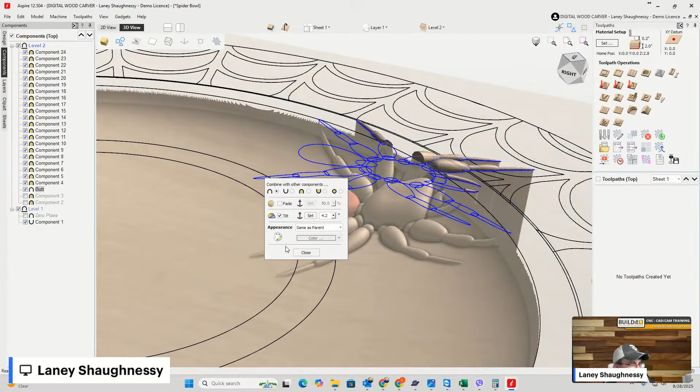Let me come to the side so you can see. When I tilt this, I'm actually kind of raising that back area, right? You know, raising that back area. So I don't want a major tilt, just want to raise it up a little bit back there. Now I can right click and show all - maybe not all. There we go, so now you can see when that comes together, how it's kind of got that kick up on the back.

On the legs and everything, right now this is looking kind of like a tick almost. But on the legs and all, let's say for instance this leg here, component number 22, I'm going to right click and show only this, and with that selected I'll go into that smudge tool.

On here, actually, ladies and gentlemen, let me hit cancel for just a second. Let me go into here, I'm going to hit save, but I need to go in and increase my resolution. Oh, I'm an idiot.

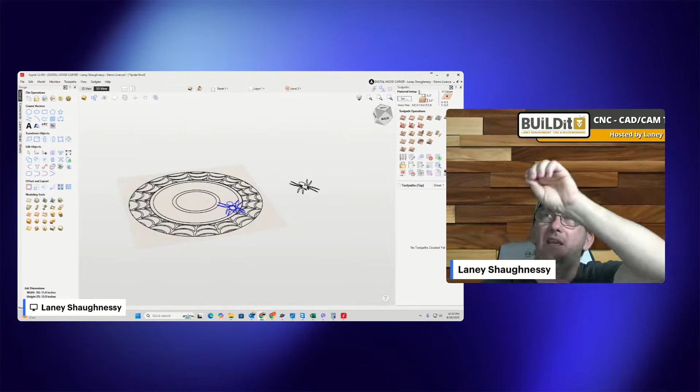I'm an idiot, ladies and gentlemen. I'm building a small model, let me make myself bigger here. We need to move the spider over to its own sheet. I'm making a small model on a big 15-inch project, my 8 million pixels that are getting spread across that spider is only using a small amount of those pixels.

Of those 8 million pixels, so that's why it's so badly pixelated. What I need to do properly is create a new, smaller sheet the size of the spider, and model on that sheet so I get that full 8 million pixels, that higher resolution. Then I need to take the component I create and copy it over to the bigger sheet. But I need to model it on a smaller one.

So I need to take my vectors and the components and move them to a new sheet. And that sheet needs to be edited. I believe my spider is 2 by 3 inches, so edit.

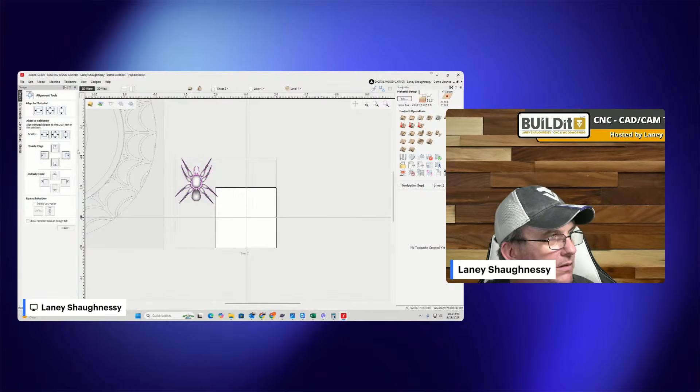We're going to go 4 by 4, center that onto that sheet. Now when we look at this in the 3D view and everything, we have a much clearer look at the parts - they're not so pixelated, that mass pixelation you saw is gone.

All right, so one more time, we're talking about this leg here. On that component we're going to say show only this, we're going to come over here and go into the sculpting. Still quite pixelated and all that stuff. We'll do a little bit of smoothing on the leg here, not a whole lot.

But here, if I wanted to, kind of push some of the leg to give it a little bit of an organic shape, let me kind of pull that back into that joint area. Oops. I wanted to give it some kind of shape where it wasn't so rounded or so flat.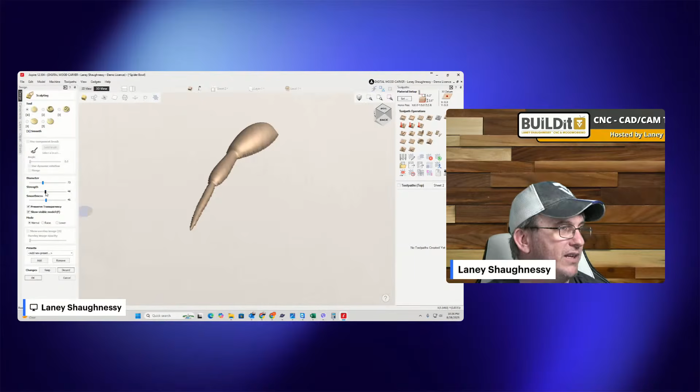I can smudge, turn down my strength, doesn't need to be that much. I can kind of just pull some of these things into position, pull back into this leg. If my aggression - if I really, you can see when I pull and push, I'm still smoothing. Hold on a second, let me discard that.

Meant to be smudging. When I'm lower there and pulling and pushing, I'm just kind of flattening that area out, giving it a little bit of an organic shape. I could be aggressive with the strength, really taking some of that material away while keeping the transparency, so I could do whatever I need to do. I can come in and smooth that back out after I flatten it.

That's the wrong tool, I didn't hit smooth at all on that. Whatever it is that you need to do - I'm actually not going to do anything on the legs. I'm going to just leave it as is. Go down to show all.

That's a crazy glitch. For right now, let's turn off the vectors. This is going to be my spider.

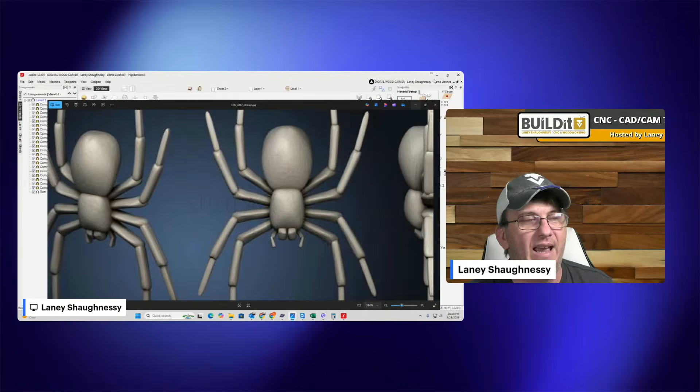That could have been accomplished just as simply by coming in on this vector, and instead of doing a rounded profile - let's go to the 3D view for a second - instead of a rounded profile, I could have done an angular profile, limited to let's say 80%, with the angle at 35, and click apply.

It doesn't need to be that angular. You'd have to draw off the vectors a little different for that to work, but I could go into sculpting and smoothing and pull that stuff back out - that's really not the right approach though. So angular profile is not what I want. Let me undo that.

What I really want is just to smudge it into that point. I also had, instead of using sharp angular, I could have used this one. On the create shape area, selecting this vector, I could have said I want the top somewhat narrow and the base somewhat fat, and I do not want to preserve inside corners - I want to blend it with the other vector, and that would have created this shape.

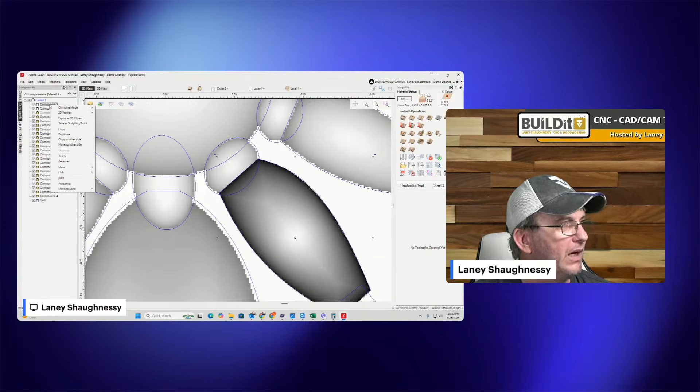Okay, let's go back to here. All right, so there's our spider. Now on the spider, it's created in that higher resolution there and everything.

So now what I'm going to do is - that's the visible model right there on this sheet - I'm going to go in and export that as 3D clip art.

I'm going to put it in the long way around here. Let's go to this PC, C drive. I don't have a shortcut yet on this one, but users, public documents, Vectric files, clip art, animals, spider.

All right, and then with that, I can come back over here and out of my clip art, go down to the S's.

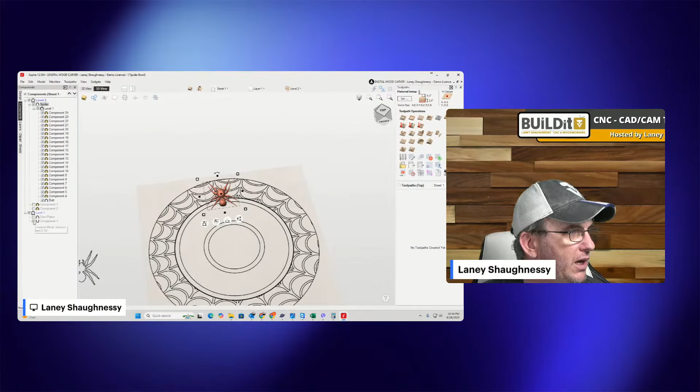But let's wrap this up by going over and turning on our dish, our spider web and our ring, and then on side 2, turn on that base.

Now I need the spider and the spider web to play nice with each other. Right now, the spider is adding to the spider web. I need it to merge with it.

And I need it to be in a position. Let's move the spider over here. And let's size him to fit. I'll get them to sit on top of the web here in just a second, but let me get...

All right, and then on its properties and stuff, we're going to elevate that up just a bit. I'm going to be creating what's called a draft again. You'll see that in just a minute, but let me get to where he looks. Let me get in the top view so I can see it from the top down.

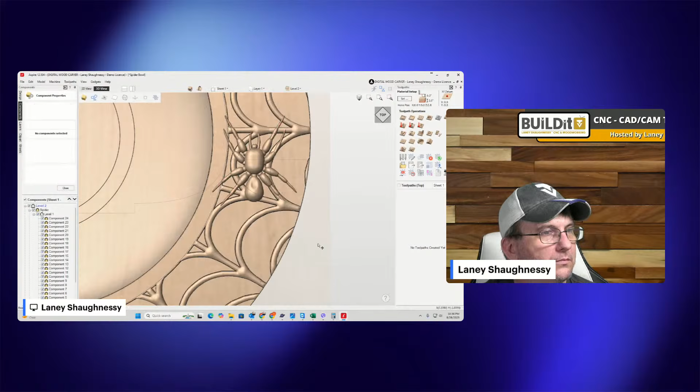Okay, now on the spider, I'm going to show only this because it needs to be the visible model. Show only this. And then I'm going to go in and create the draft.

So you'll see it flare out. Okay, if you don't want it to draft that much, we can back that off a little bit, so it's a little more subtle.

And then in the components, that model with the draft is our new spider there. So we'll turn off the original. And then we will come and show all.

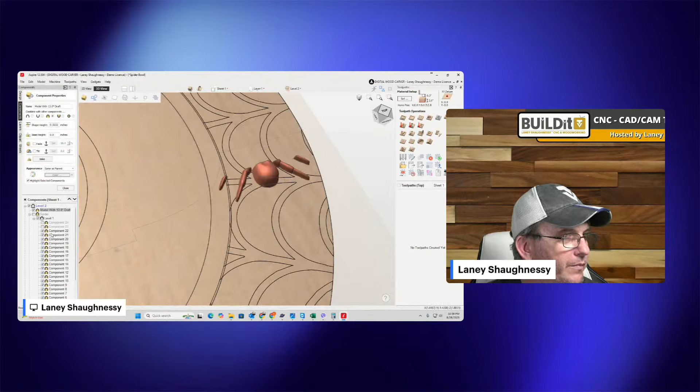Let me turn this back on, turn that off. Here, let's do it this way. Show only this. I don't know what that glitch is, but all right, let's go down here and turn that on, turn that on.

So here's our dish, it's just round right now. There's no shape, it's not, it's just a round bowl, just a round dish and everything. But just to show you what could be created, we could change the shape of this. It could be elongated. It could be whatever you wanted it to be. But right now, it's just a candy dish.

And we could actually reduce the thickness of this lip right here. We can bring that down a little bit, because this whole thing, this whole size has to be 2 inches from the top of the spider to the bottom of the bowl there. But this is what the bowl looks like, so it's going to sit on the table.

This rim, again, I could have had this bowl flare all the way out to the edge here, to that bottom, and just flatten out at the bottom. I didn't have to have the rim just kind of floating in the air there. That rim is actually going to be thinner. We're going to take that down, but that's it. So there's your spider bowl.

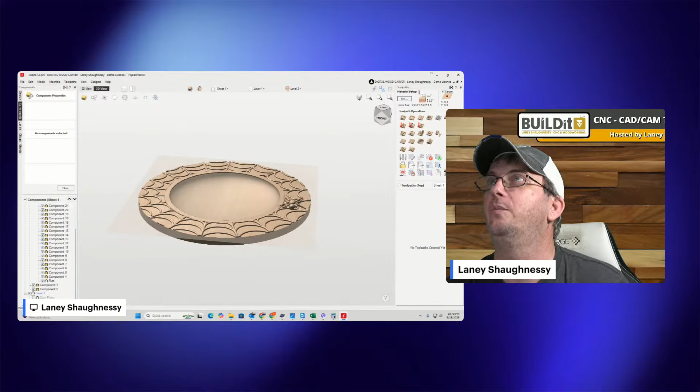And what I'm going to do, ladies and gentlemen, and I made that, dadgummit, the whole thing I was talking about, I was in small view. What a booger. But let's look at it from the top.

So that's it, right? So, but this could have, again, it didn't have to be round. It could have an organic shape to it.

You know, it could look like, we could make the spider web look a little, it doesn't have to be so symmetrical, right? We could change the vectors up a little bit to make some of the loops smaller or bigger or more narrow. We could bring things closer. It's all in the vectors. If you get the vectors drawn however you want, then when you create the model, it's just going to create in that shape, right? And everything.

And like I said, on the bottom side here, this part of the dish and everything don't need to be this thick right here. So how that's going to get changed is, all that is from this thickness right here, this lip. So let me close this and turn off this model for a second. And let's turn off the guidelines for a second.

On this vector here, we can make this so it doesn't have to be this thick at the rim. So we go into node editing. When you select a node, if the anchor is selected too, turn that off, because I don't want to move that, I just want to move this. So I can pull this down and then pull this over again, whatever I need to do just to make sure I'm on that line. That's the most important thing.

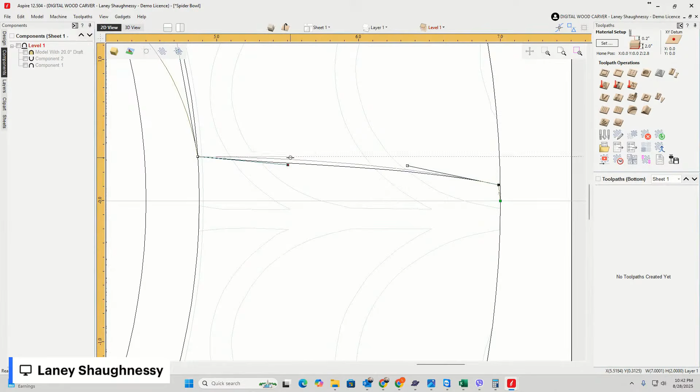But I can bring this down thinner. I could even have it taper in like that. And I could come in here and give this a little bit of a taper there, right? That kind of thing. Whatever.

Now if I recreate that shape, you remember how we did that. Let's turn this off, turn this off, turn that off. When we recreated that shape, we did it with the turn spin tool. So we come in here to that spinning and turning vector tool. With that selected, hit apply.

And now if we look at that, you can see that it's a much thinner lip, and it has a slight kind of curve to it. Whatever you wanted it to be.

I think I would actually want it a little bit thicker, so let me hit reset on that. Let me pull this up just a little bit right there. Let's do it again. Apply. There we go.

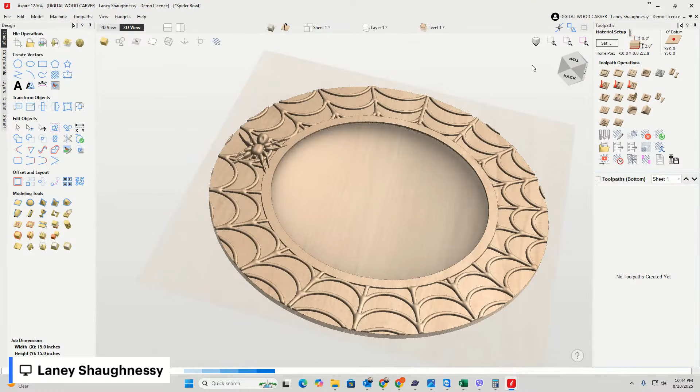Now, we didn't get to cut all that stuff. We could probably do that in another class. What I am going to do is finesse this just a little bit, make sure I like the spider the way it is. And then I'm going to export this as a model and make it available for download for y'all.

Oh hold on, I got one model to turn on the other side. Let me find my little dish. There we go. Again, I want this to have a taper to it really quickly. Let me go in there and add that draft back in, that 20-degree draft. I think I turned my resolution up. Let me see how long it's going to take.

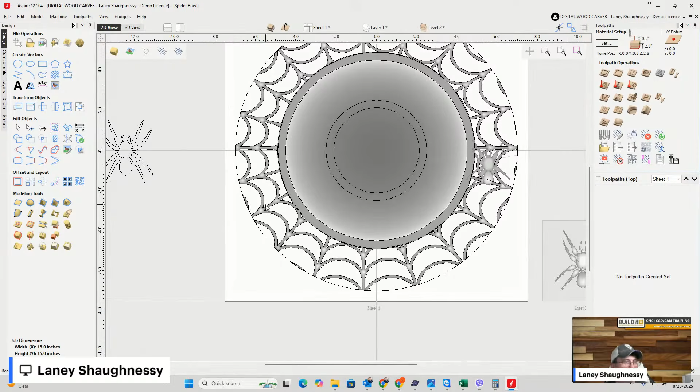But also, like I said, on the bottom of the bowl as well too, which again we're not getting into tonight or anything like that, but on the bottom of that bowl and on the bottom here, probably could drape over. It'd be an add, but let me pull that up again.

If you see the bottom of this bowl here, the shape of that bowl there, you know how it has that kind of, it looks like a spider web almost, just because of the grain of the wood and all. But I could have the whole bottom have that shape all the way up to the rim, with a little bit of meat for the rim. I could have it match where it is on the spider web, so these peaks match where the peaks of the spider web would typically be.

So, I mean, all kinds of things, I could really create and have some fun with that. And I'll probably play with it over the weekend. If I make another model with that webbed pattern, I'll be sure to record that so y'all can watch. And I'll also make that model available to y'all as well.

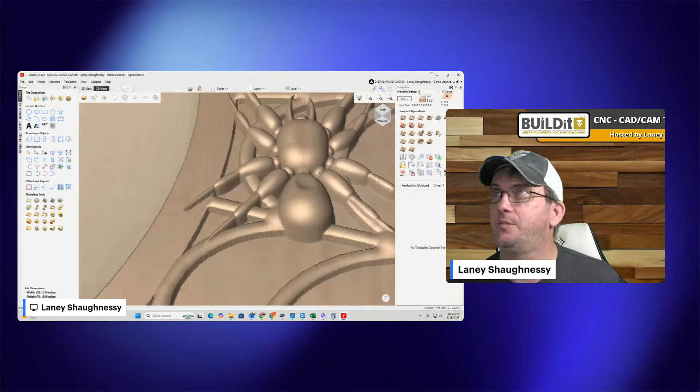So I hope that you got something out of tonight. I know many of you don't have Vectric Aspire, and we're doing a lot of modeling and things like that, the way models combine with each other, add, subtract, and things like that, the way that the tilt and fade and stuff. So there's a few little things in there, learning things, working with vectors and drawing shapes and stuff. All of that stuff plays a role in everything, everything plays a role, and hopefully you got something out of that.

When am I inviting you over to the poker game? As soon as the poker table is built.

And ladies and gentlemen, I've made a decision that I'm working on. There's a couple of people that want the plan for the poker table. I'm working on that plan, but the reason why it's taking so long is I'm actually going to build the poker table, and I'm going to film the making of it, a series. Then I'll have the files available and all that stuff, but I'm actually filming the build, and I'm hoping to start that sooner rather than later, so you can see it. It's going to be a cool project, and it's pretty straightforward, there's not a lot of complication to it. It should be a good, fun build, an easy build, not too complicated.

All right, everybody. Let's see here. John says you could glue, say, a piece of walnut on top of the maple and then carve the web so that it is dark. 100% correct. What John is saying is, on your block of wood, you could have a thin piece of walnut glued to a maple block. The bowl and everything would be maple, and then the darker web would be the walnut, and the spider and stuff. You don't have to have a 2 inch block of wood. You could glue a block of wood, just the thickness and size of the spider, on top of a piece of wood, so that when it carves, there's wood there for it to carve away. You don't have to have it flat all the way across, you could add these on.